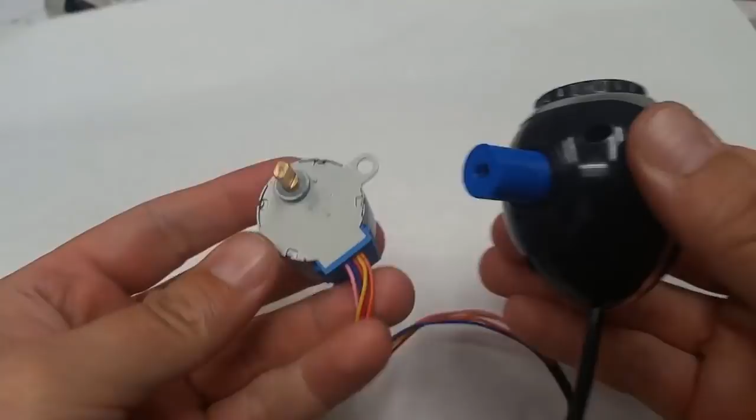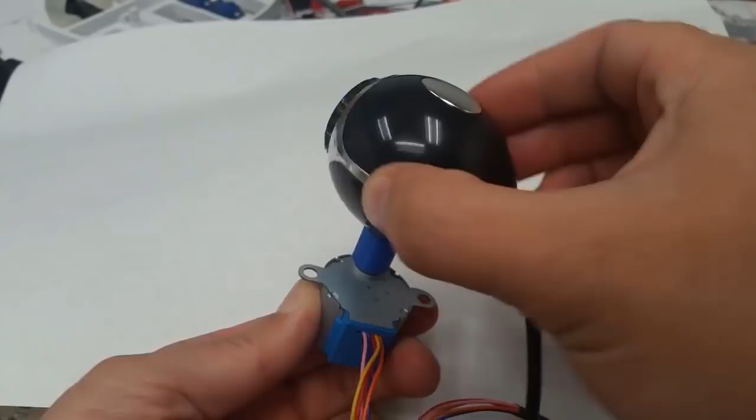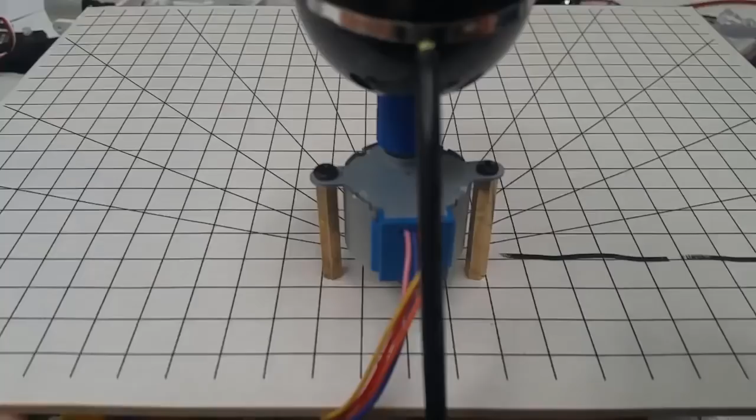Then use two standoffs to attach the stepper to the board like this. The holes that we want to use are marked on the board. If they aren't drilled out for you, use a 3mm drill bit to drill the holes here. Then attach the motor like this. This will give you more stability while we do this tracking operation.

Next, we'll write some code in PSoC to set the velocity of the stepper motor. Here's what we want our PSoC code to do. Wait until it receives a value over UART to indicate the motor speed. Then get another value to indicate the desired direction. Then use those values to set the motor speed, and then loop around and wait for a value over UART again. We're going to do our actual control code, the PID, in Python, which we'll be using to read the camera image.

Now, in order to make this work, we need to be a little bit more efficient with how we set the stepper motor speed. In the last lab, we set the motor speed by calculating the length of a delay between steps, and then using CyDelay to wait that amount of time between each motor step. That was an easier to understand way to do speed control, but now we don't want to do that because our code won't be able to do anything else while it is pausing between the steps.

We would like the code to be able to check for a new UART value while it is pausing between the steps. In order to accomplish that, we're going to use PWM to make the stepper motor turn at a desired speed. This method is a little harder to understand than the first way we did it, but it's more efficient to run. So follow along and build your code as I do to set this up, and I'll try to explain what we're doing as we go.

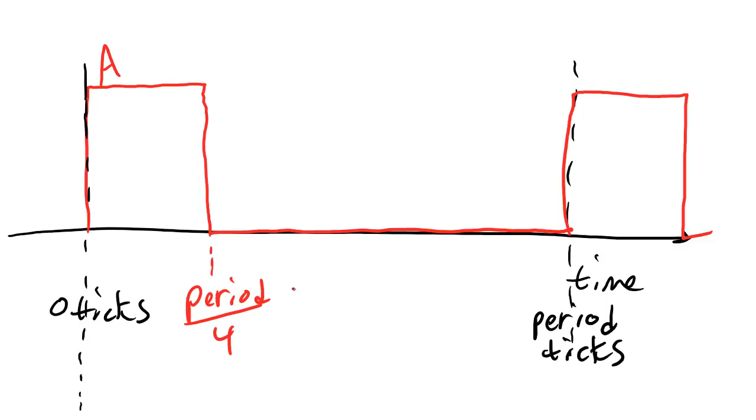Now, in order to make the stepper motor run, I need to have 4 different signals. The first one, which I'll draw in red, I'll call this signal A. This is the signal that makes the first step happen. It energizes the first pole of the stepper motor. That signal should go on at 0 ticks, and it should go off at period over 4 ticks.

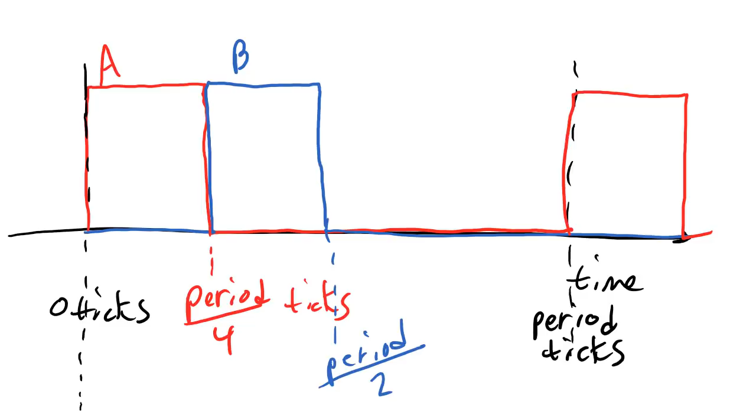Then I have to have another different signal that's off while A is on, and then it goes on immediately after A, and it should go off at period over 2 ticks. Then I need to turn on the third pole, so I have a third signal here that goes on at the time that B goes off, and C goes off at 3/4 of the period.

And finally, I have to have a fourth signal that's off while A, B, and C are on, and then it goes on for the last 1/4 of the period. If I can create a signal like this, it will drive my stepper motor. So I just have to figure out how to make a PWM signal do this. Here's one way that we could do that.

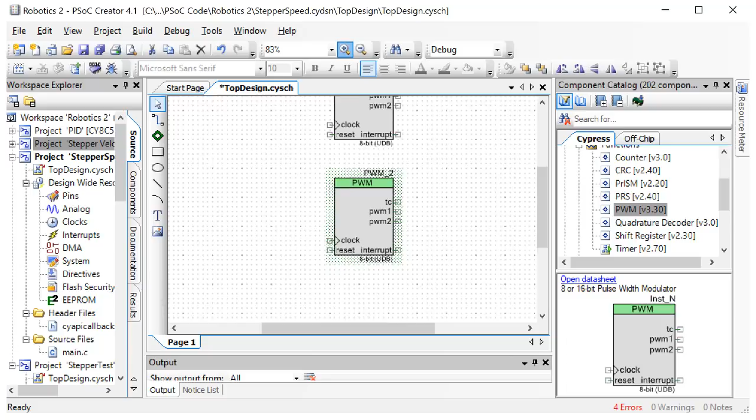Now we're going to do this in PSoC. Create a new project and let's go get some PWMs. Over in the Digital Functions menu, drag 2 PWMs to the window. Then let's set up our inputs. Under System, go get a clock.

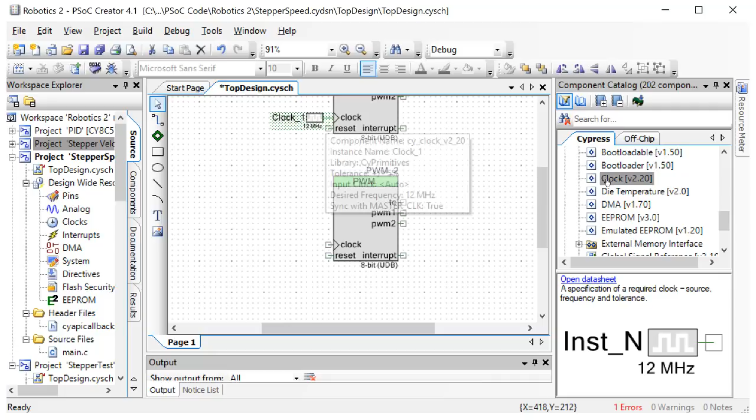And here we actually want to use the same clock for both of the PWMs. So just place one clock connected to the first PWM and then use this little connection wiring tool to connect that same clock to the other clock input. We're using the same clock because we want these two PWMs to be totally synchronized with each other.

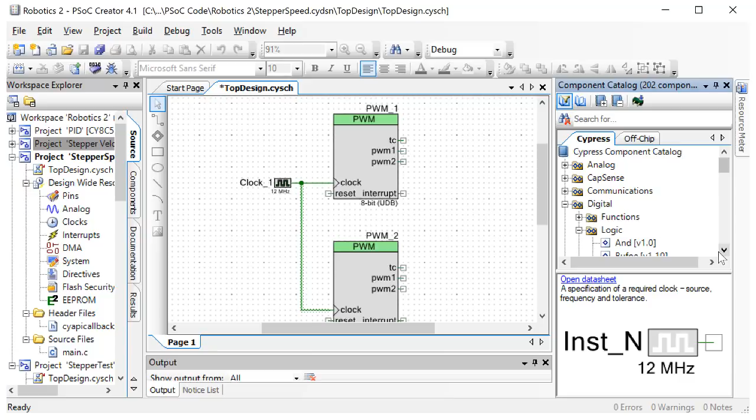Now, under Digital Logic, go get a couple of logic lows and wire them to the reset. Now, let's take a look at these settings here. Make this a 16-bit, and we only want one output.

I'll set the period to 100 for now, just so that we can see what's happening. We'll change this period later. Now, when I set the period to 100 and the compare value to 50, the signal is on for half the time and off for half the time, which is what we want for one of these two signals.

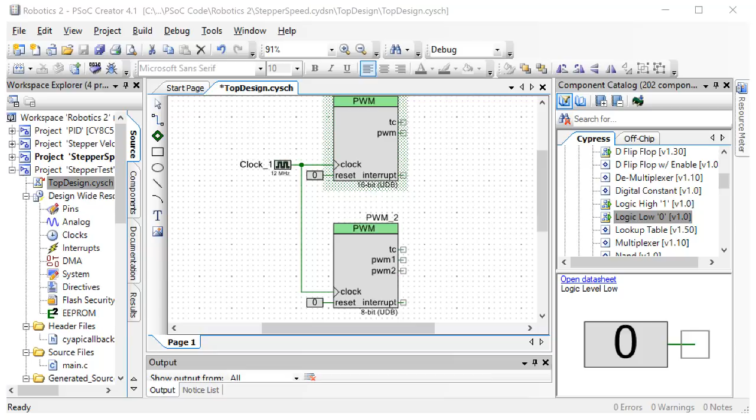Now, in the second PWM, I'll also make it 16-bit, one output, but select Center Align. And then for now, we'll set the period to something. I guess I'll do 10,000 here. 5,000. We just want the compare value to be half the period. We're going to go back and change these things later.

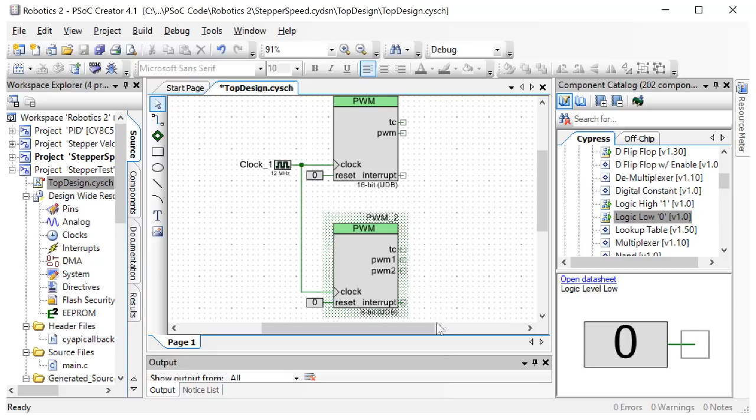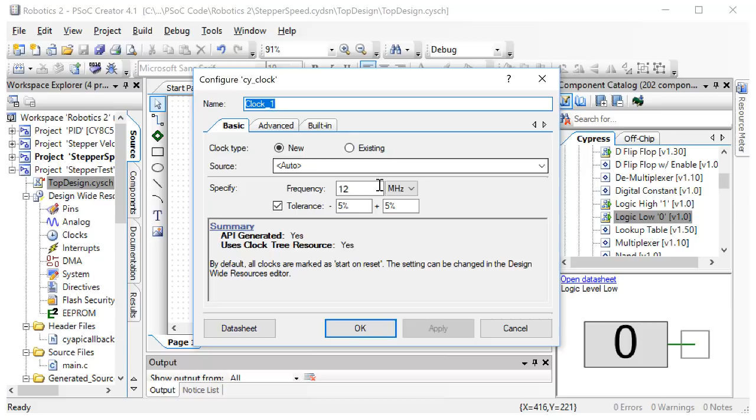So if I do this, Center Align, I now have the two signals that I want. One signal that's on for the first or second half, and another signal that is on for the last and first quarter of the period. Now we need to change our clock speed because our clock speed will determine the motor speeds that we can achieve. Set your clock speed to 10 kilohertz.

Now take a look at this. If I switch this compare type 1 between greater and less, I will swap which half of the period is high and which half is low. This is also true of my second one. If I switch between greater and less, the signal swaps. This is how we're going to manage to reverse the direction of the motor.

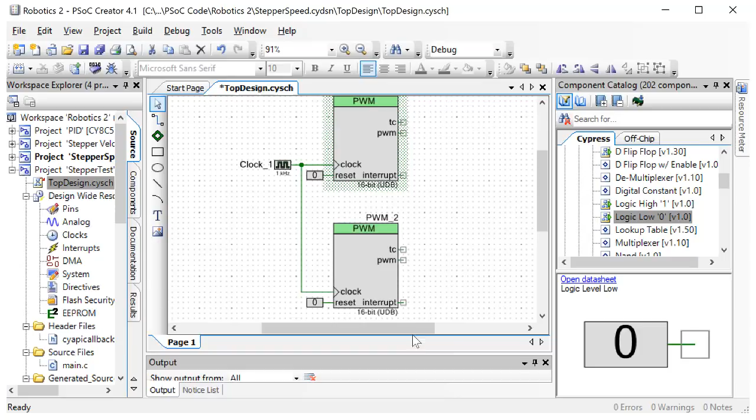So you have to actually select firmware control here for the compare type. Firmware control means that we're going to be able to change this in our code, and that's what we need to be able to do in order to reverse the motor. Now, here's where we need to set up all of this AND logic that gets the right signal to the right pin. Go get 4 pins and place them in the window. These 4 pins will be for the 4 poles of our stepper motor.

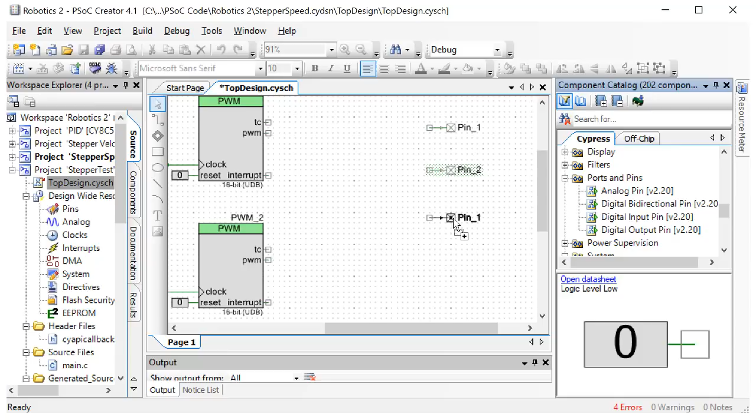And your clock here should actually be 10 kilohertz. Make sure your clock is 10 kilohertz. I made that mistake here before. And then the period should be 1 second. We want this because if the period is 1 second, we have the ability to get pretty much the correct range of speeds of the stepper motor that we want for our tracking operation.

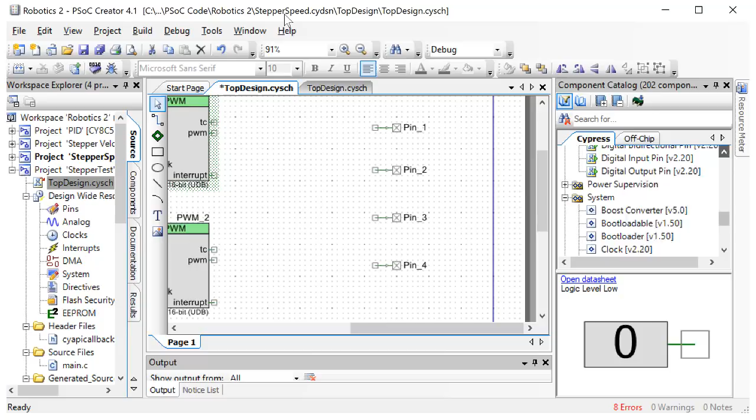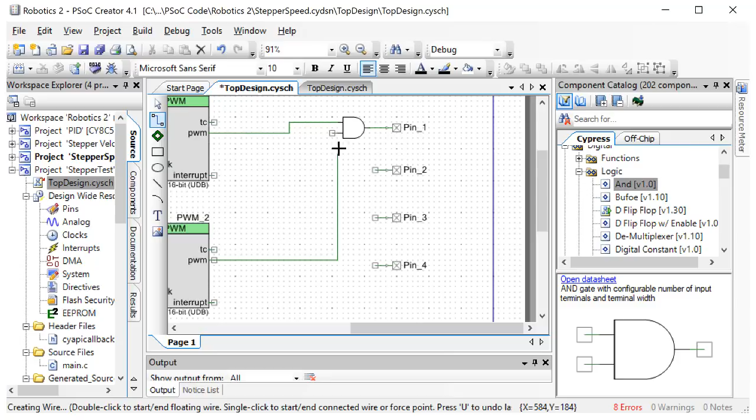Now, in the menu on the right, scroll up to find the digital logic and find the AND junction. We'll connect the output of the AND to pin 1. For one of the two inputs to the AND, we'll do the first PWM, that is alpha, and then the second PWM represents our beta. So this will turn on pin 1 only when alpha, the first PWM, and beta, the second PWM, are both on.

Now, one other signal that we want goes on when both alpha and beta are off. So I'll get a NOR junction. A NOR junction goes on only when both of the inputs are off. So I'll wire alpha and beta to the inputs of the NOR, and I'll call that pin 2.

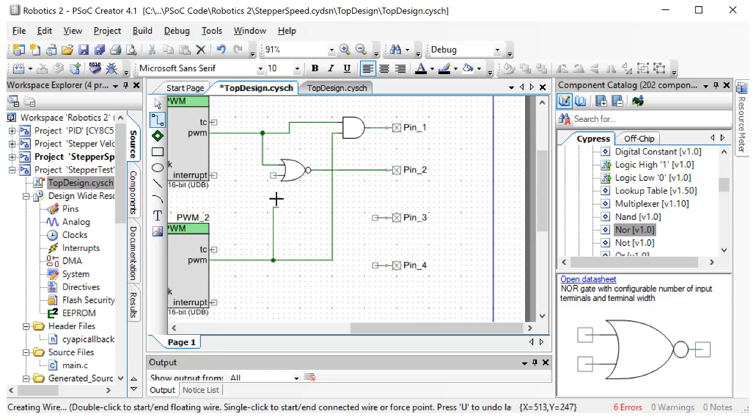Now, another one of the signals that we want goes on when alpha is not on and when beta is on. Let's see if we can do that. So I put an AND, wire it to pin 3. Then I'll take a NOT gate here. So I'll do not alpha, and then I'll wire beta to the other side. So pin 3 is going to go on when alpha is not on and beta is on.

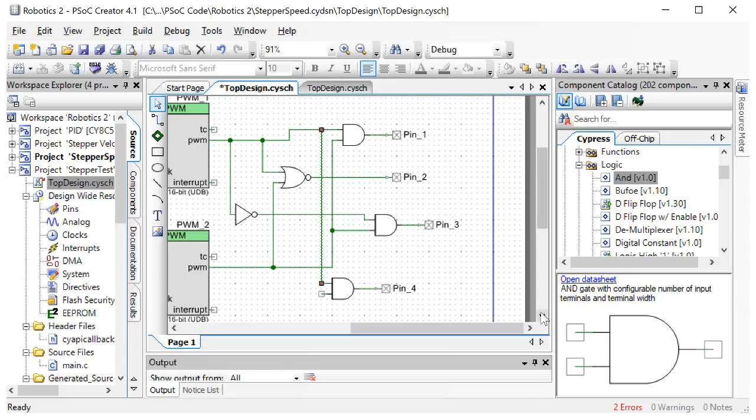So I have one more combination here. This one will go on when alpha is on and beta is not on. So I'll find alpha. Here's a wire that connects to alpha for the top. And then I need not beta. Alpha and not beta. So I have the 4 correct signals, but I probably don't have them in the right order here. We'll figure that out in a moment.

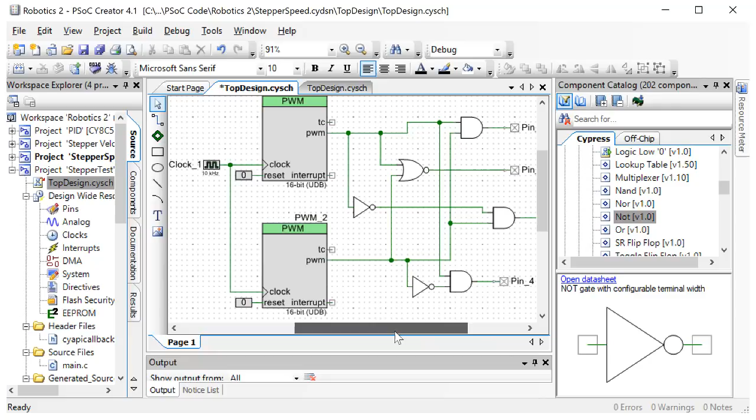Go to the pins. You can select whatever pins you want here. These just have to be the 4 pins that you've connected to In1, In2, In3, and In4 on your stepper motor. I connected mine to 01, 02, 03, and 04, but you can have these be any pins that you actually connected to your stepper motor.

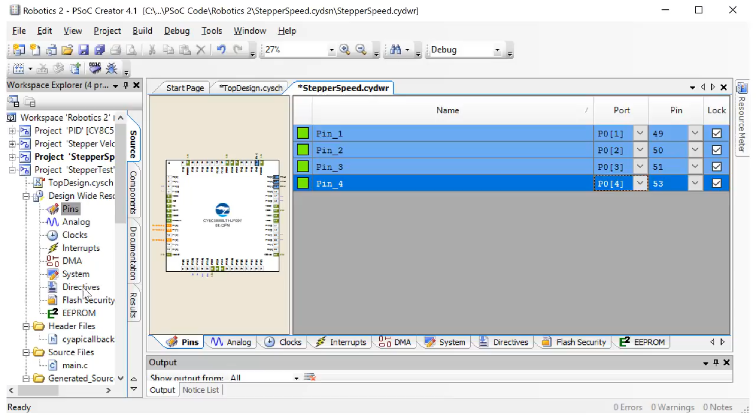Okay, go ahead and program the PSoC. We've placed a bunch of things on the top design, so we want to check and make sure that this program goes through and correct any errors we have right now. Then go to your C code and clean it up a little bit. And all we're going to do here is turn on PWM1 and PWM2.

Here, I'm going to make sure that the period and compare values are set the way we want them. I'll write 10,000 to the period and 5,000 to the compare value for both PWM1 and PWM2.

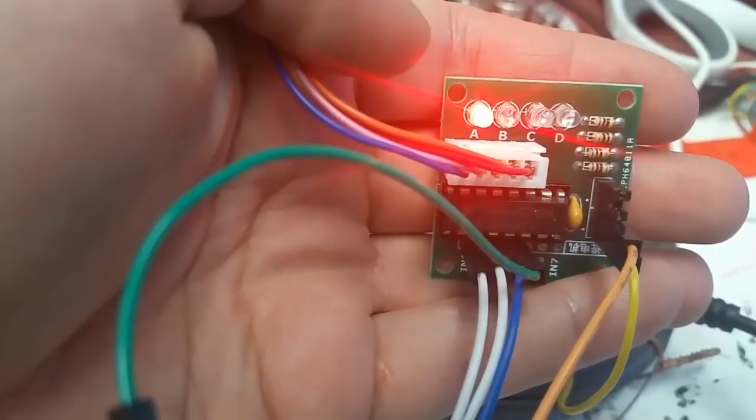Then program the PSoC, and here what you want to do after you've programmed the PSoC with just this simple code, watch what your stepper motor does. Your stepper motor should turn on A, then B, then C, then D, and then it should repeat. Or it should go D, C, B, A. Either one of those is fine, but it should go in either A, B, C, D order or D, C, B, A order.

If it doesn't, swap around either the pins in your PSoC code or the physical wires that you have connected up until you get it to go in the A, B, C, D or D, C, B, A order. Once you have that figured out, come back here to the video and we're going to set the motor speed.

So we'll create a new variable up at the top, float motor speed. And for now, we'll use units of steps per second for the motor speed. I'll set it to 10. Then I'll create an integer for the period. The way we're going to change the motor speed is by changing the period of the PWM. So we need to calculate the period based on the motor speed.

If we take 4 times the clock speed, that is ticks per second, and we divide that by the motor speed, which is in steps per second, and we know that there are 4 steps in every period number of ticks, this will allow us to calculate the period, the number of ticks per 4 steps. So instead of writing a constant 10,000 to each of these 2 periods, we're going to write the period that we just calculated. Then, instead of writing a constant 5,000, we have to write to the compare value half the period.

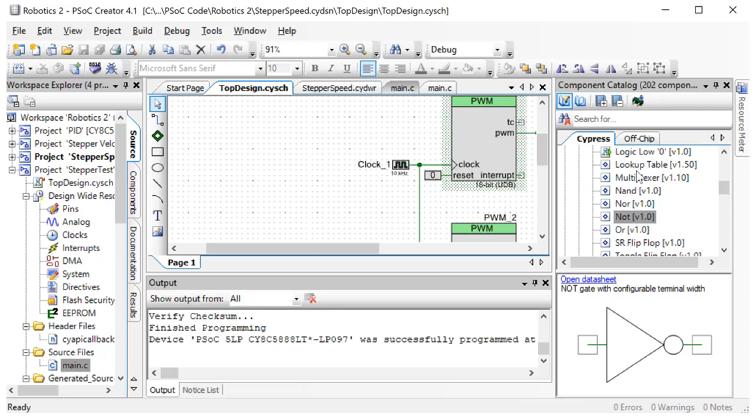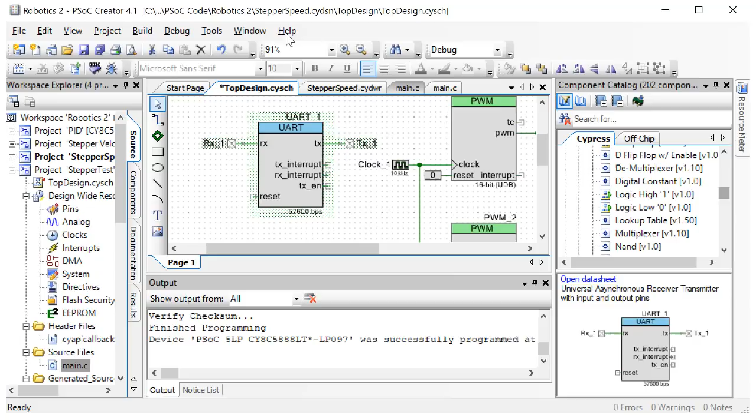If that's working, we're now going to go set up our communication. Go to your top design, expand the communications window, and get a UART. Place the UART on the screen, and then go down to logic, get a logic low, wire it to reset, and then double click on the UART and set the bits per second to 57600.

Back in main.c, we will start the UART 1 and we'll create an unsigned 8-bit integer called receive1. Remember that we're going to receive 2 things, one thing for speed and one thing for direction. So I'll have receive 1 and receive 2.

Now we want to do all of this inside of the for loop because we need a loop for our control. So the first thing we'll do in the for loop is receive 1 is UART1 get char. Then we want to keep checking as long as we haven't gotten a value. And whenever we haven't gotten a value, we think that we've gotten the value 0. So while receive 1 is 0, we will continue receiving a value.

Then I'll copy these 3 lines and do it again to get receive 2. One of these 2 numbers is going to be a speed number, and the other number will be a direction number. Now, it's possible that these 2 numbers could get out of sync, so I don't necessarily know which of these 2 numbers is direction and which is speed.

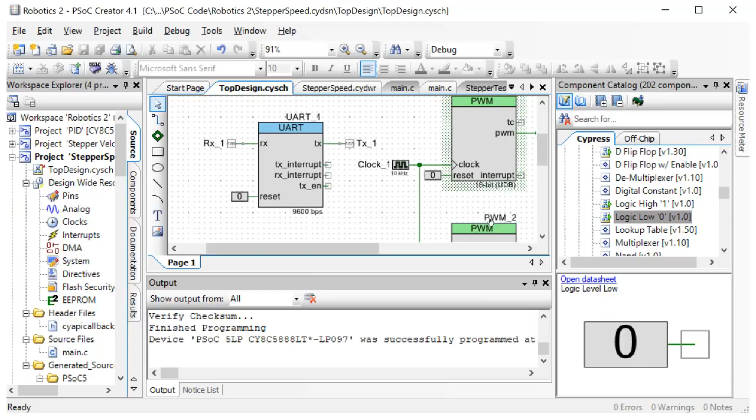Now you might notice that when you reset your PSoC so that it restarts its code, it starts turning right away by default. I would prefer if the motor doesn't turn at all by default. Go back into your PSoC code and double click on the PWM block and set the compare value to 0 for both of the PWMs. This sets their default values so that when you run the code initially, it won't go anywhere. Program the PSoC and test this to make sure that this worked and your stepper motor doesn't go anywhere.

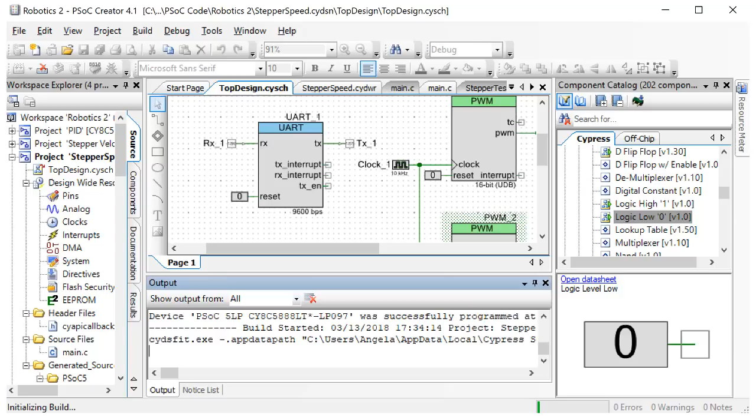Okay, now it's time to go and set up our actual control code. The sensor feedback we're going to use is the location of an object in view of the camera. We already have lots of code for finding the location of objects, and for now we're going to do a simple object location algorithm. If you do this final challenge, you will learn how to track different kinds of objects using different methods. For now, we're just going to track the location of a red object. We already have this code, so I'm not going to develop it for you now. You probably already have it.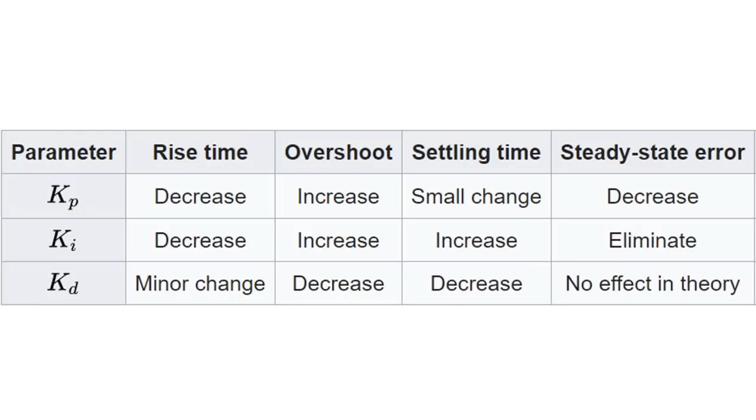Try some different values of KD and make observations about the behavior of your controller. Then we're going to go on and add integral control. Integral control changes the speed of the motor based upon how the error adds up over time. The longer error is present, the greater the speed becomes. This is most useful when you have a situation where you just can't get rid of your steady state error. Integral control will also make the motor get to its target position faster. That is, the rise time will decrease.

Unfortunately, integral control also makes the overshoot worse. That's one of the reasons why proportional, integral, and derivative control is often used together. Adding the integral control will make the positioning faster and more accurate, but will make the stability worse. In fact, here's a table that summarizes the effect of increasing the gains of derivative, integral, and proportional control. So oftentimes, derivative control is added to improve the stability, decrease the overshoot, while integral control is added to improve the accuracy.

So here's how we add integral control to our code. I'm going to put the integral control in before the derivative control so that we can take it out if we want. I'm going to do ki times the sum of the error. And then I'll do plus kd times d error, but for now I'm going to comment out the derivative. Here I need to add ki is equal to 0.01 or something like that. You always want to add in just a very small amount of integral control, because if you have too much, your system will go unstable.